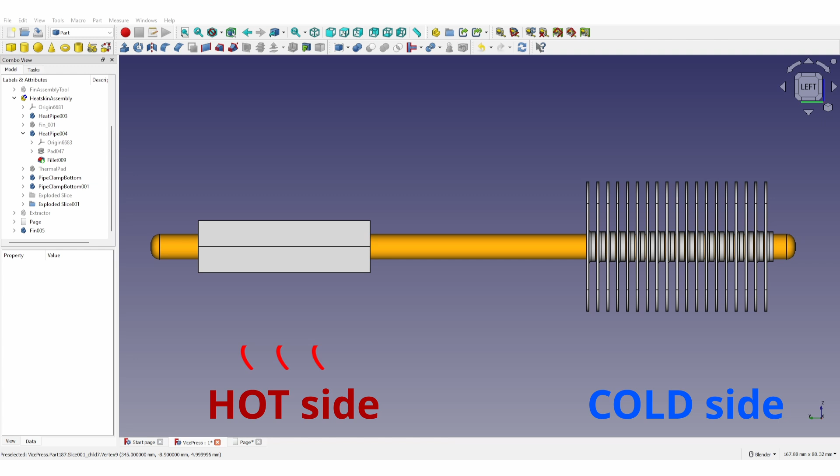However, before tackling the full-scale version I thought it would be wise to start with a smaller, simpler model to test the process. This is a typical aluminum finned heatsink with copper heat pipes. The heat pipes transfer heat from the hot side to the cold side, where it spreads into the fins. The heat is then dissipated into the air, usually with the help of a fan that pushes air between the fins.

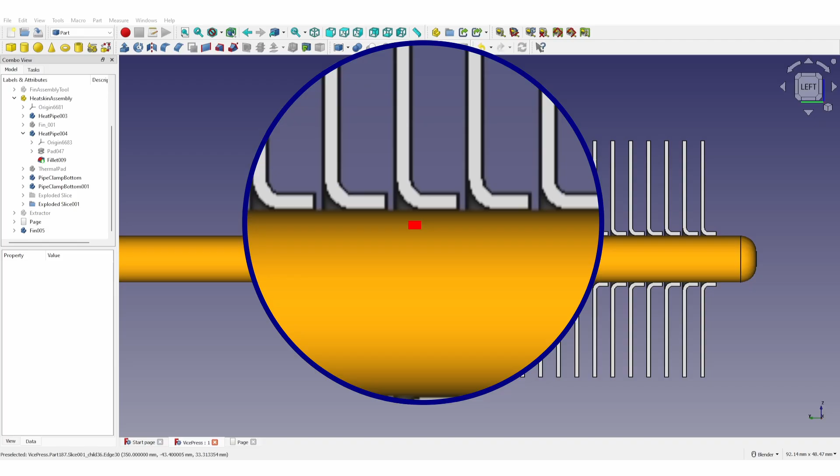The challenge here lies in the precise dimensions and tolerances at the interface between the fins and the heat pipes. The sheet metal is thin, and you want to maximize the contact area while keeping a low profile. This requires tight bending and tight fitting on the pipes.

So the question was, can the sheet metal be formed at this scale using dies made from resin on a low-resolution printer? The outcome was uncertain because resin-printed parts are quite brittle, and durability was also a concern. For a heatsink designed for a 40mm fan, you need about 20 fins. With a 90mm fan, you need roughly twice as many. So another question was, how many fins can you press before the die gets damaged? These are some of the questions I aim to answer with this test piece.

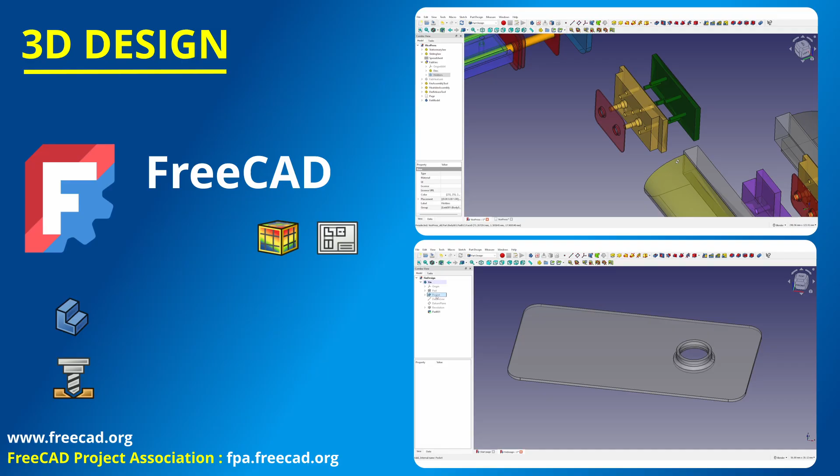So before going into the details, let's have a quick overview of the process and tools I used. For 3D design, I use FreeCAD, a powerful open-source mechanical CAD software. It is organized into workbenches, each tailored for specific tasks like design, simulation or manufacturing. Later in this video, I will show you two quick tutorials on the Part Design and CAM workbenches.

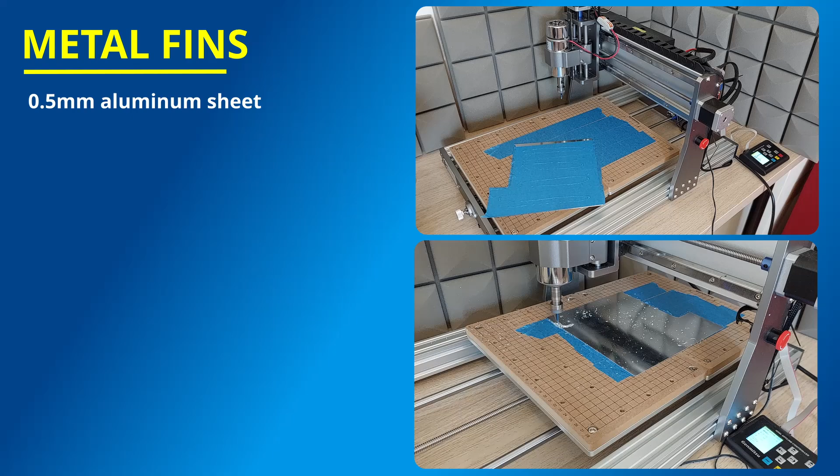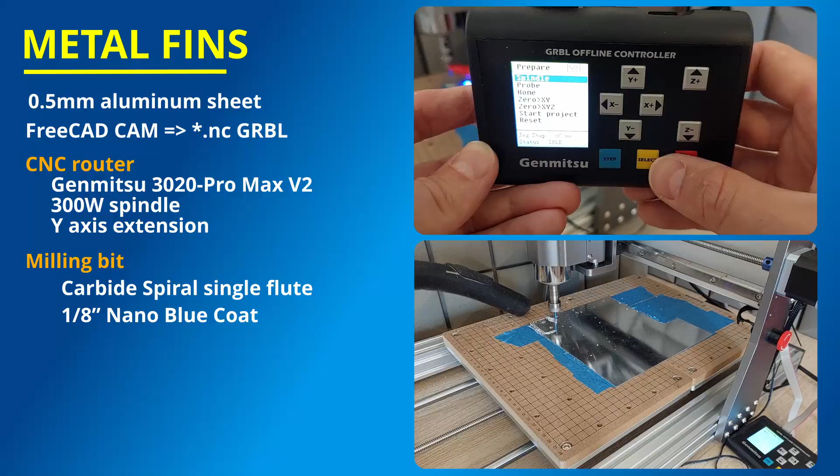The fins were cut from 0.5mm thick aluminum sheet using a CNC router. I prepared the job in the CAM workbench and exported the file in GRBL format to be cut on a Genmitsu 3020 Pro Max V2. This router has a 300-watt spindle which provides sufficient power for working with aluminum as long as the step-down and feed rate settings are kept light.

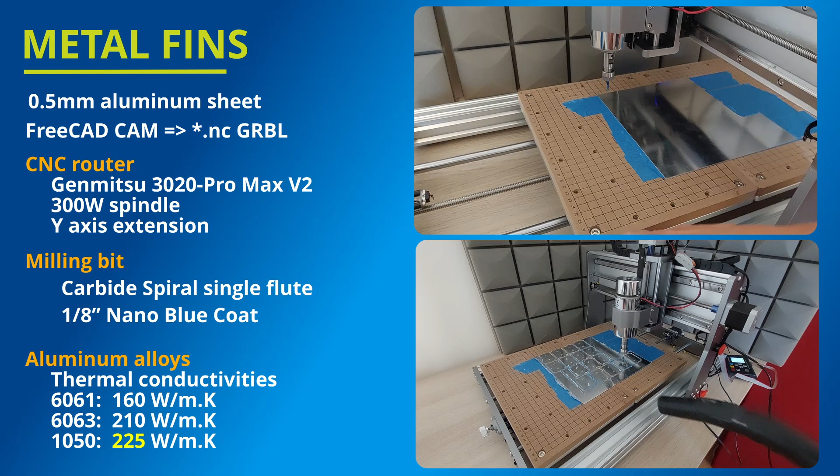For this test, I used 6061 aluminum alloy because I had this alloy in stock, but for heatsinks it is better to use 6063 or 1050 alloys, which have better thermal conductivities. The stamping dies were created in the Part Design workbench and then exported to Lychee Slicer. They were laid flat on the printer bed to ensure the features remained straight.

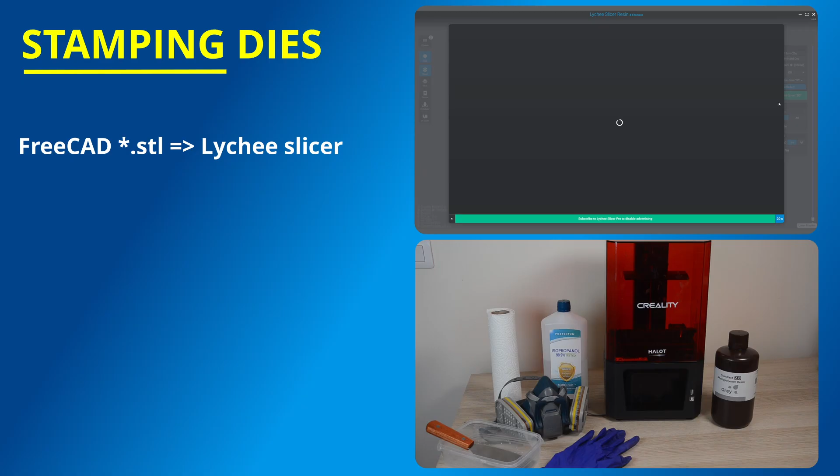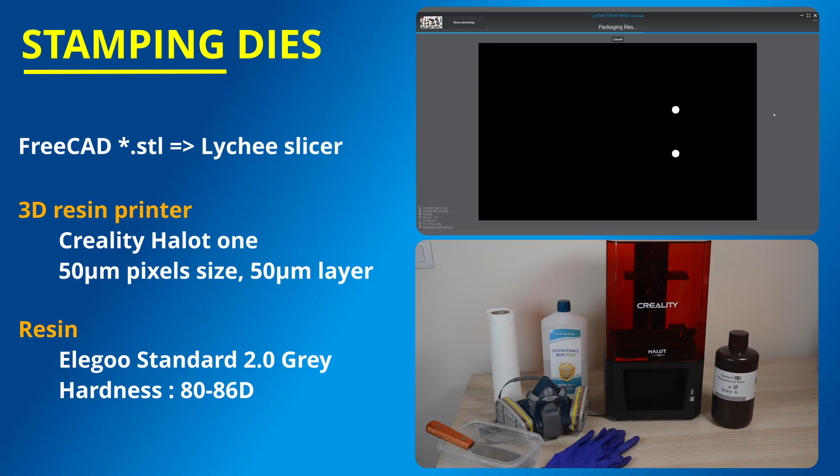I used the Creality Halot 1 printer, which has a 50 micrometer pixel size. While it's not the latest model or the highest resolution, it was sufficient for this task. I used the standard 2.0 grey Elegoo resin, which has a hardness of 80 to 86D, and the prints were cured under sunlight.

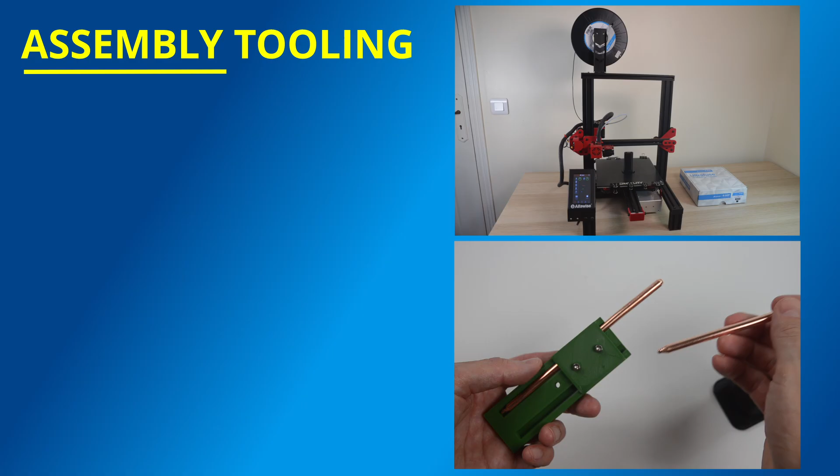The STL files for the assembly tooling were exported to Ultimaker Cura and printed on an Alfawise U30 Pro using standard PLA. Although the printer is not the most recent model either, it is still capable of getting the job done. Finally, the sheet metal forming was completed using a Vevor vise, which provides up to 2 metric tons of clamping force.

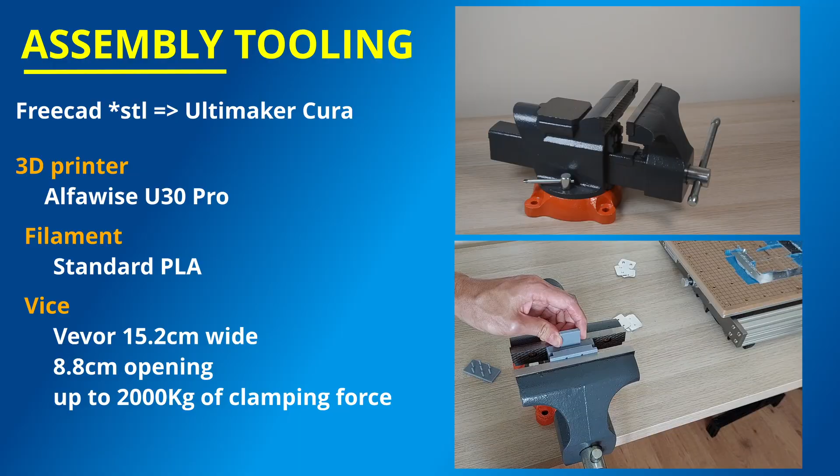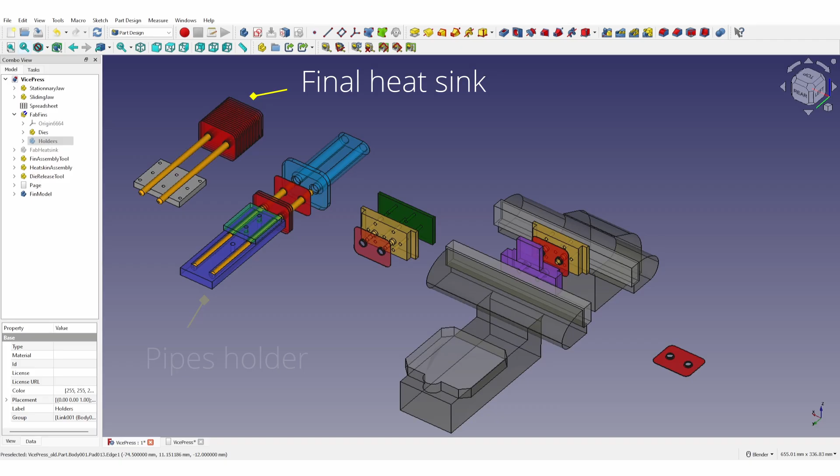So let's dive into the design with FreeCAD. You can see each step of the project: a fin, the vise and the stamping dies, a die release tool, the manual assembly tooling consisting of a pipe holder and a fin stacking handle, and the final heatsink assembly with a preliminary pipe clamp.

First, I made a 3D version of my vise and then I designed the fin and the stamping dies. I thought I would create attachments for the jaws to hold the dies in place, but in the end I decided for this test to hold the dies by hand, so I added a little tab on one side. We can switch to a 2D view of the fin and the dies made with the TechDraw workbench to better see their dimensions.

The heat pipes I am using are 6mm in diameter. For good thermal transfer between the pipe and the fin, a large contact area is needed between them.

I thought that 1mm would be okay, so I made the bending radius 0.5mm. This makes the fin 2mm thick. I chose to test a 5.9mm inner hole diameter. There are guiding elements to align the dies, and I added a wedge for a gradual bending of the metal

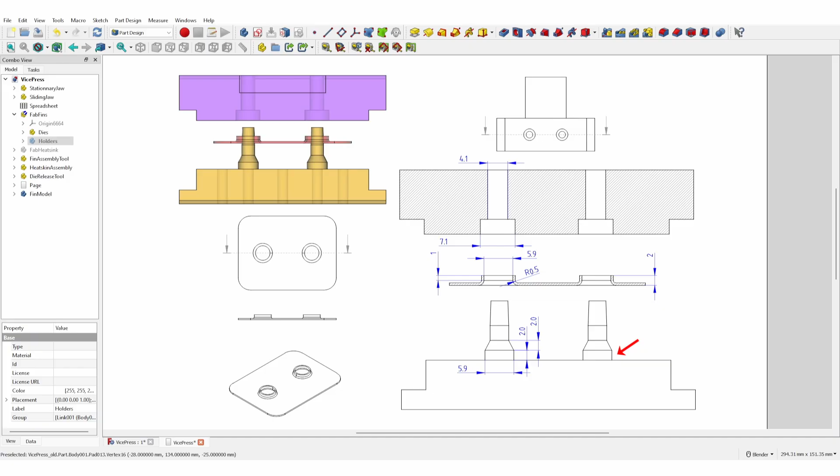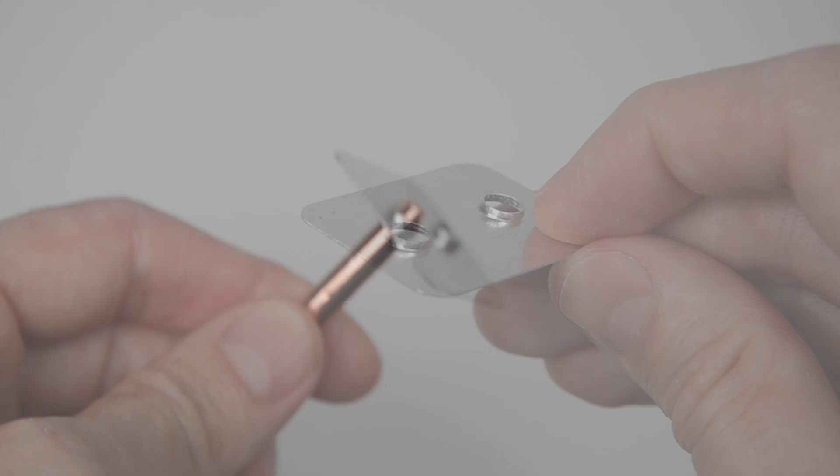sheet. However, as you can see, I did not make any drafts that could help release the stamped fin from the die. I did a first test and the sheet metal was hard to remove from the die, but the bending was good and the fit with the heat pipe was tight enough. I decided to keep the face straight to keep this good mating with the heat pipe.

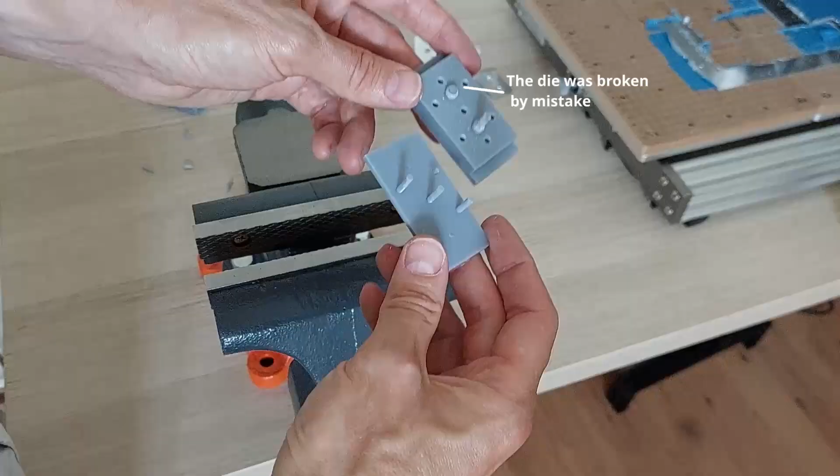So I made a die release tool consisting of small rods that are pushing the back of the fin through the die. As we will see later in this video, it worked, but most of the rods broke in the process. But I did manage to finish the batch of 20 fins. Clearly, I made the rods too small, although there was enough space to make them larger. Anyway, it probably can be done without this extra tool by using a small draft on the die, but that will be for another test.

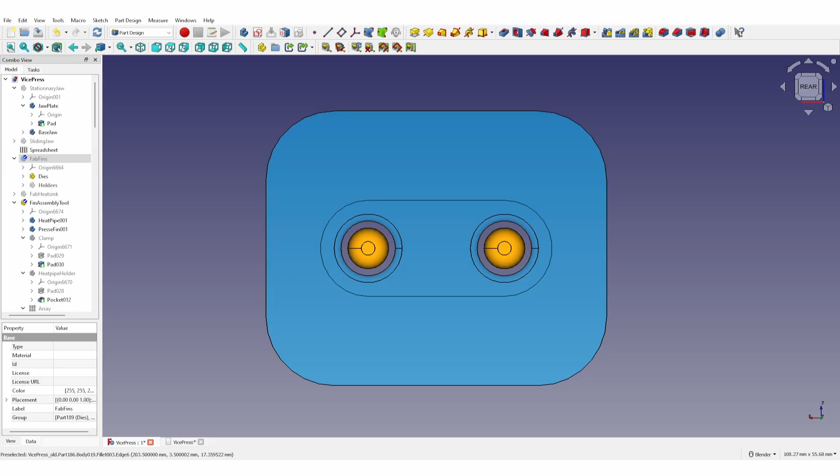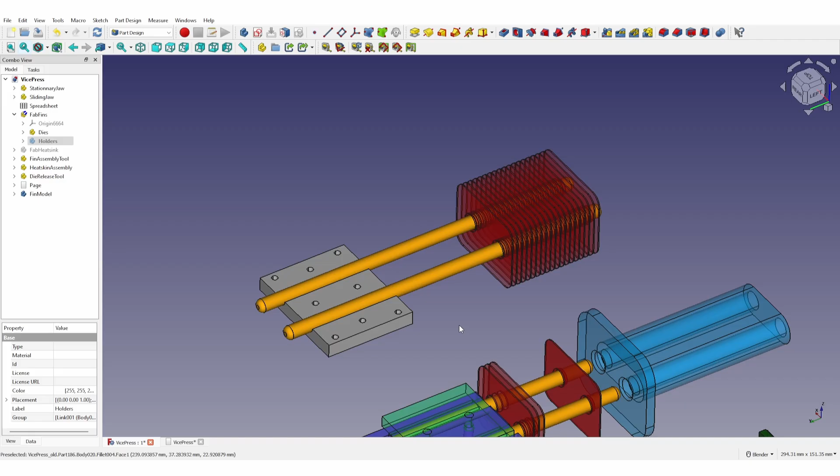Then the assembly tool is meant to hold the heat pipe parallel while the fins are being stacked. I overlooked the hole's diameter on the pushing stacking handle. I made them 8mm, but it was probably too wide. The tool could tilt more than would have been optimal. Anyway, for a larger version I will probably stack the fins using the vice and guiding elements between the assembly parts. Then there is the final assembly, which I can export to any other project in FreeCAD if needed.

So if you are new to FreeCAD, let me show you how to quickly design the fin for use in a 3D model and then another one for use in CAM to create a job for the CNC machining. So I created a new document. I go in the task panel, I create a new body, a new sketch, I select the XY plane, I make a rounded rectangle and set the dimension either using keyboard shortcut L or the toolbar.

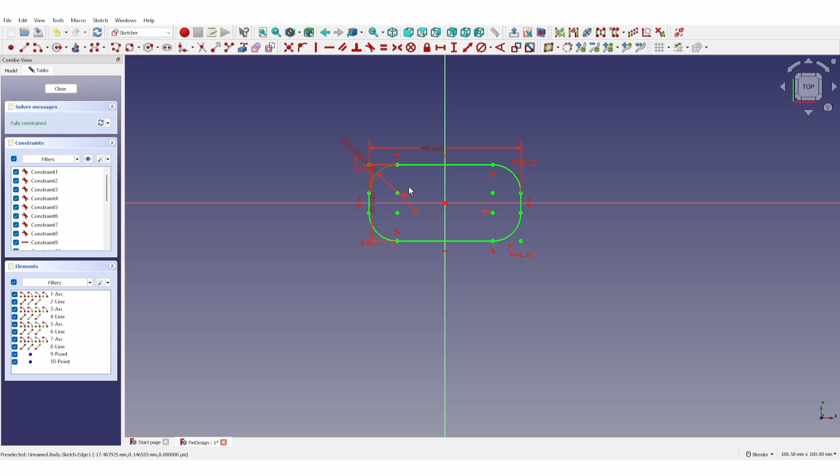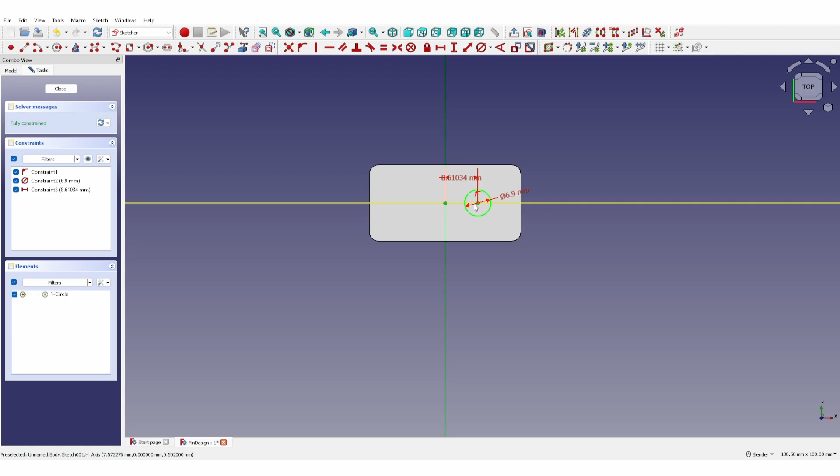Here I'll use, for example, the toolbar, 20. I make a symmetry to the origin. I press S and I make the radius with R, 5mm. I close. I make a pad, 0.5mm. I select the top face, create a sketch, make a circle, set the diameter to 6.9 and at a distance of 10mm. I close, I make a pocket.

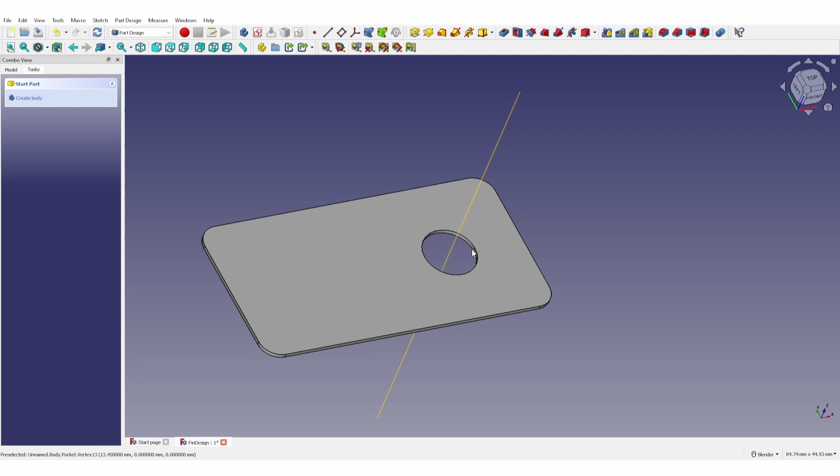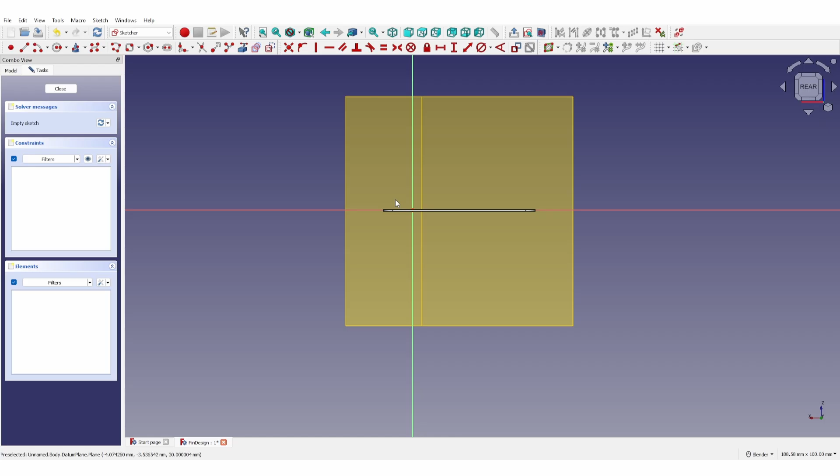Now what I want to do is create the bending, so I need to add a datum line. I create a datum plane and I constrain it on this edge and on the datum line. So this plane is on the hole. I create a sketch which is on the datum plane. I close and I hide the datum plane. It's still here, but it's not visible. And what I want to do is change the transparency so that I can select more easily the edge of the hole. I can at the same time rename the body fin.

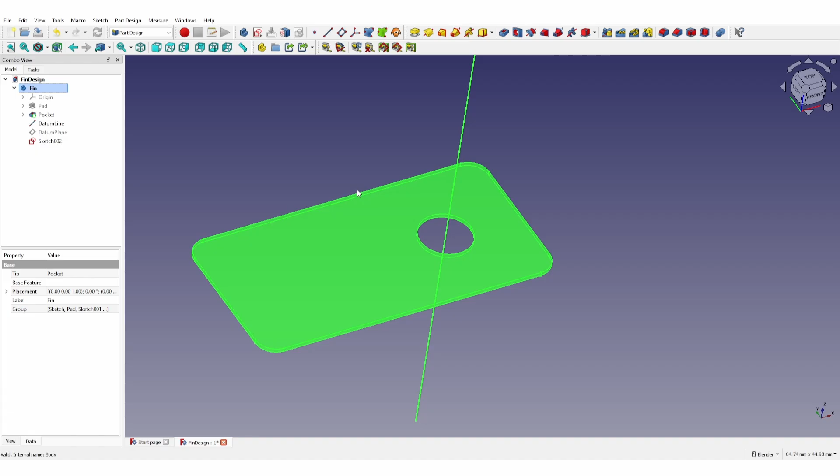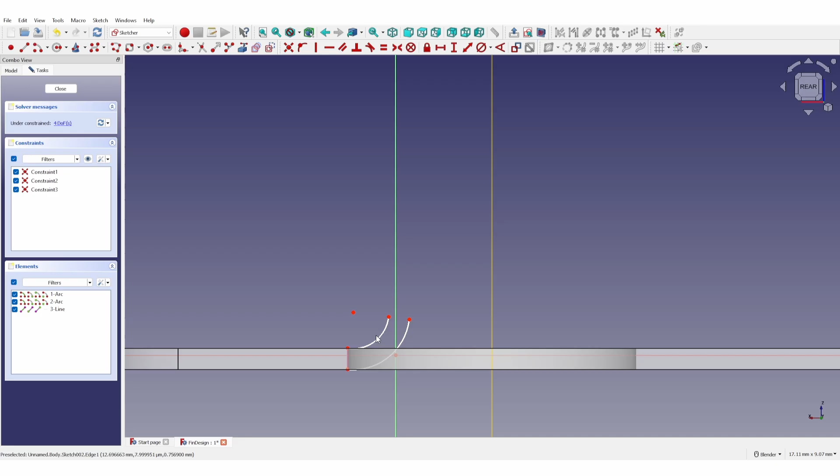I go back on the sketch and what I want to do is select this edge and project it on the sketch, and I can see it through the part. Now I want to do the 0.5mm radius bending. I need to close the shape so that I can make later a revolution. Here I switch to construction line.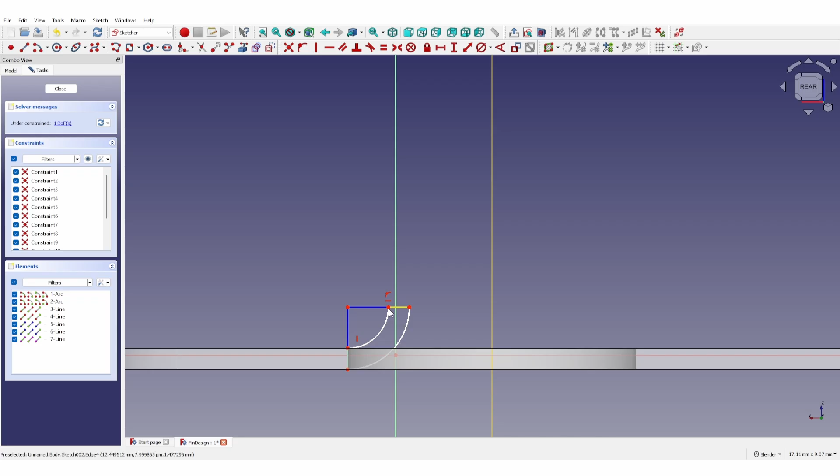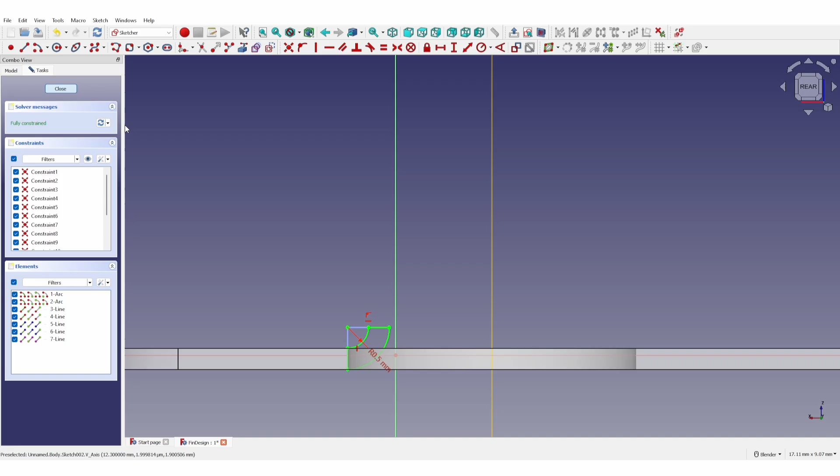I make one line horizontal and one line vertical, so I make it horizontal, here vertical, and this one I want to constrain the point onto the object. And here I set diameter of 1. Here it shows diameter, but I could set it to radius, and you see it's 0.5. I close, and now I can make a revolution. So I select the sketch, the datum line, and here I make a revolution. I select the reference. Okay.

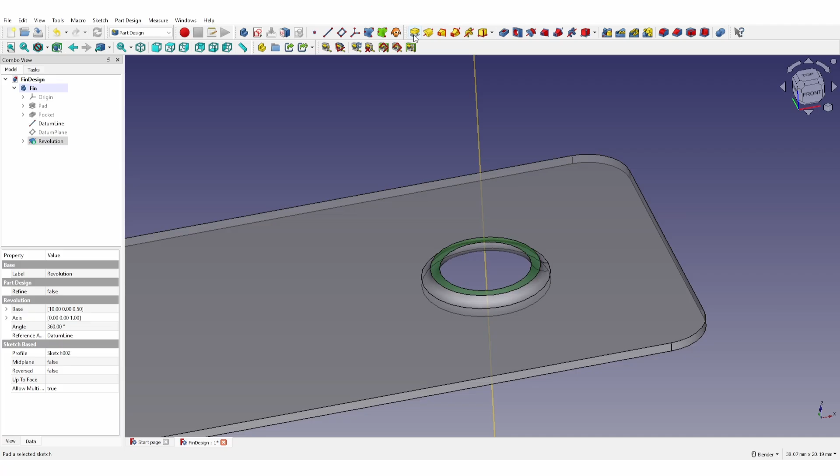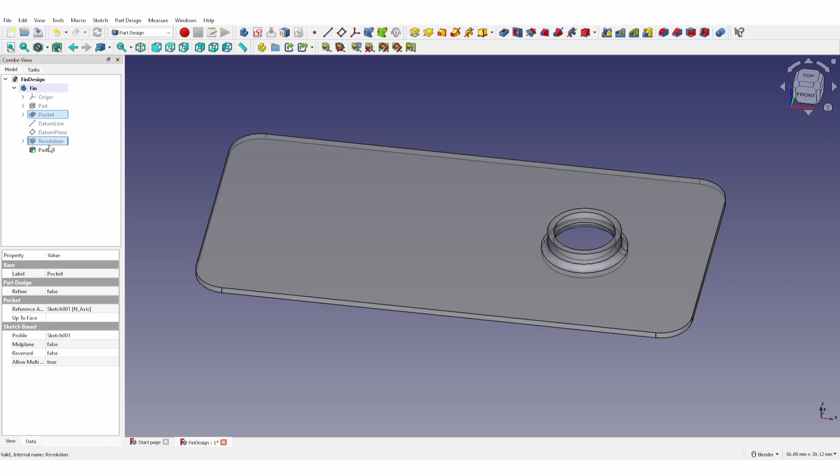Now I can select this face, make a pad of 1mm, and here I have one hole. I can hide the datum line. And now if I make a symmetry, first I select what I want for the symmetry. I want the pocket, the revolution, and the pad. And I make a symmetry. It selects automatically this plane, so I'm okay. And that's it. I have a fin to be used in a 3D model.

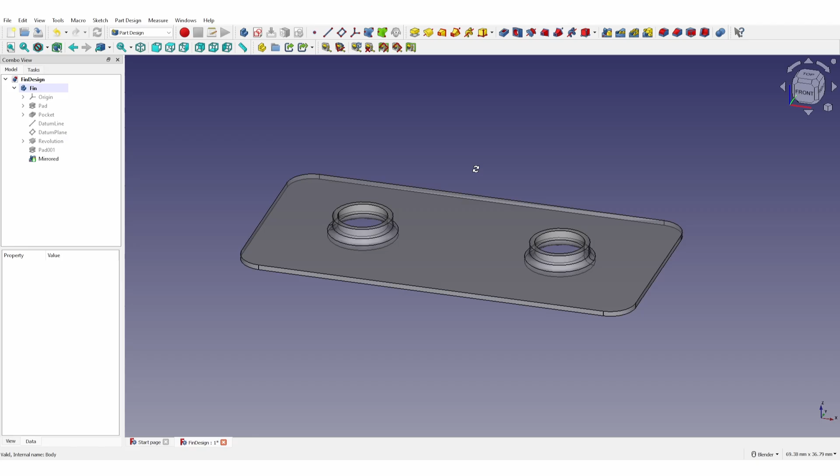Now let's see the difference with the fin needed for the CAM design. So to prepare the fin for the CNC, the process is a little different. Again, I create a body, I create a sketch, I add a rounded rectangle, I set the dimensions, I set the symmetry.

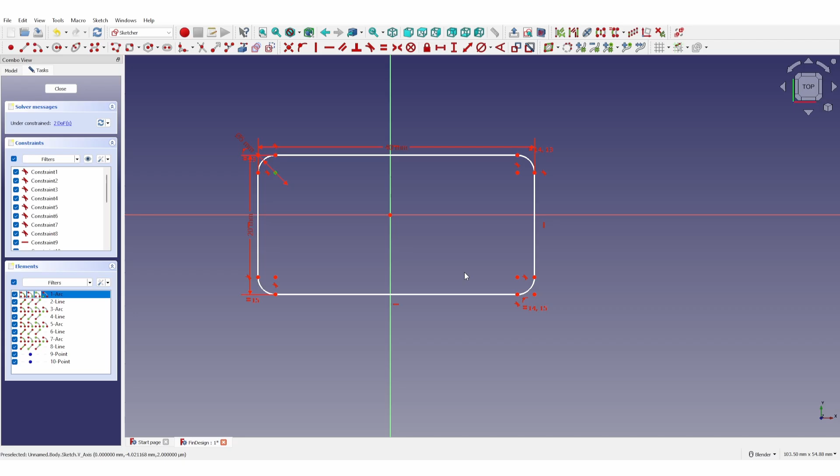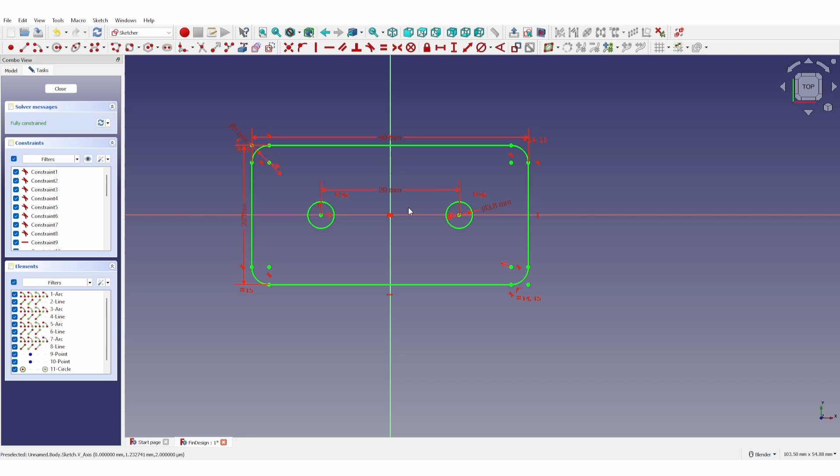Now the difference is that I add 2 circles. I set the dimensions to 3.8 millimeters and I set the spacing to 20 millimeters. The sketch is green, it is fully constrained. Now I make a pad of 0.5 millimeter and that's it for the fin. I can rename it fin. And now we can switch to the CAM workbench to prepare the job for the CNC.

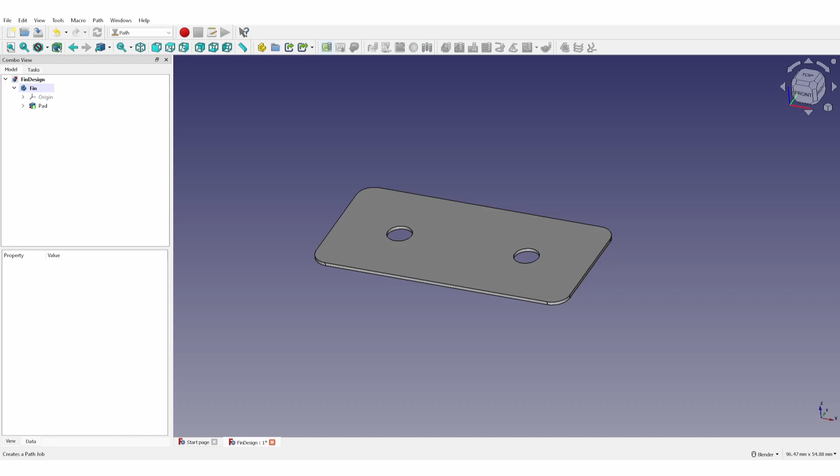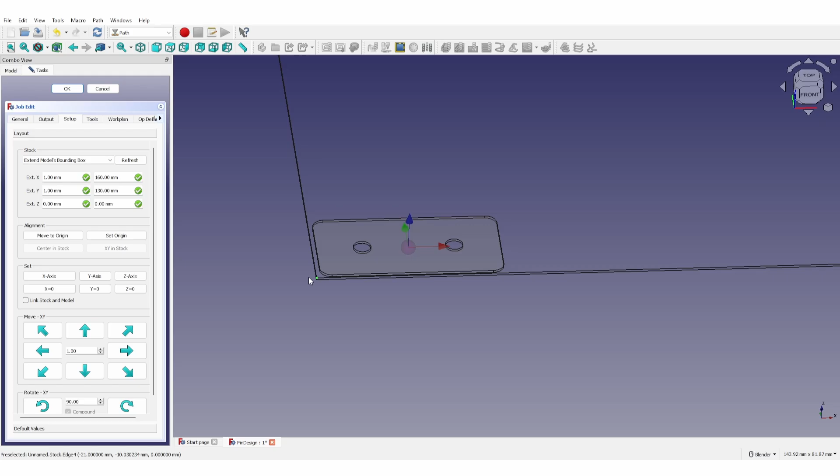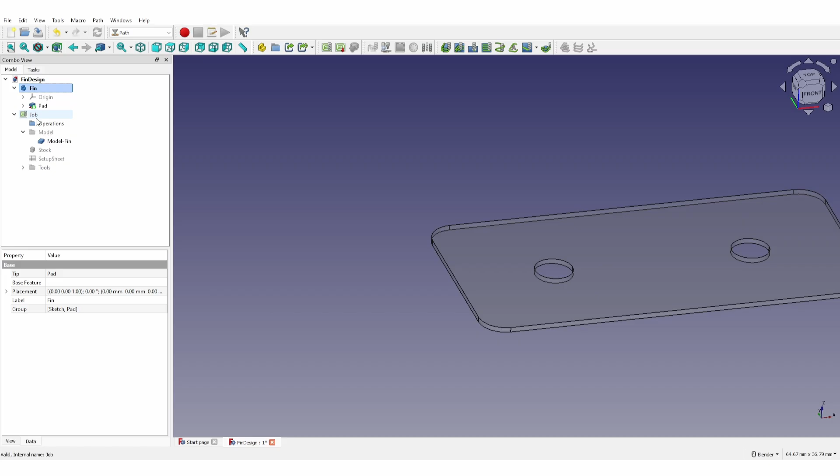So I create a new job. I set the stock dimensions to the sheet metal I have, 160 by 130. I set above and below 0 millimeter, and I want to set the origin in this corner. I want to output the job in GRBL, and the tool I will set through another interface. So I can hide the original model, show the stock.

Now I can add a tool. I already created a single flute end mill in carbide. I double click to add it. I remove the default tool. I change the spindle speed to 11,000 RPM. I set the horizontal feed rate to 100 mm per minute, 70 for the vertical. I go in the setup sheet to set the velocity when it's above the workpiece. I set the same velocities, although I could go faster.

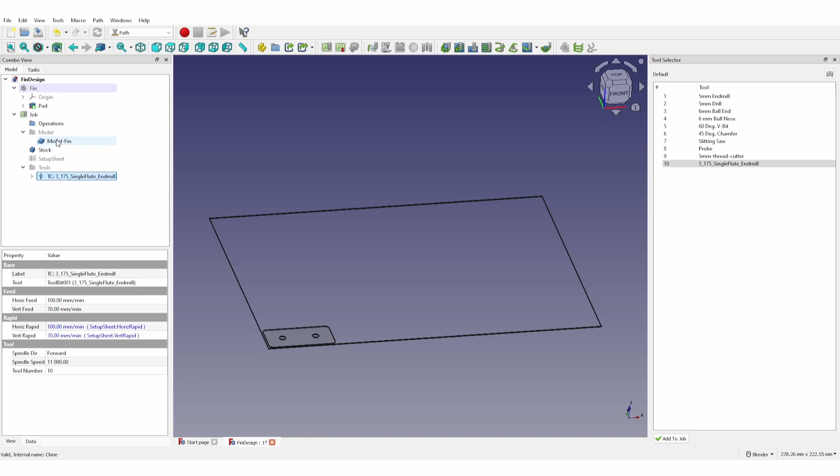Now I want to select the top face of the fin and select the profile operation. I set the depth. The top face is selected, so the start depth is 0. I select the bottom face and we see it's 0.5 mm, but I want to add an extra margin, so I will set instead 0.6 mm. I select the step down to be 0.2 mm.

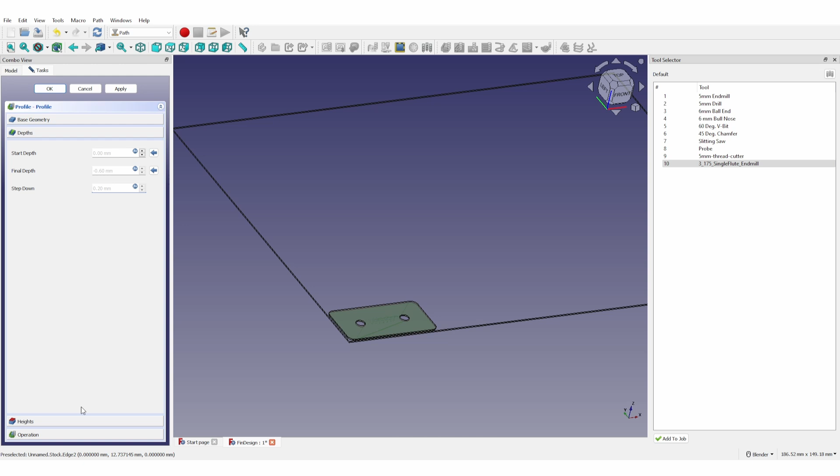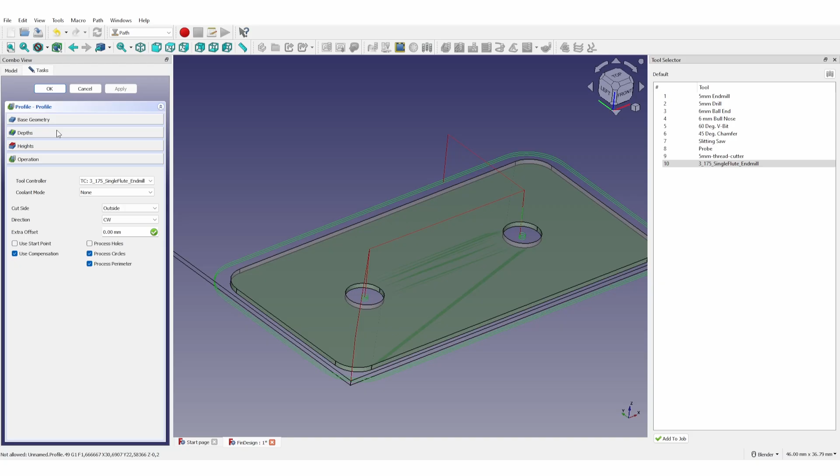I can apply to preview the operation. We see that there will be 3 passes, but the holes are not made, so I process circles. I apply, and we see the tool will go in the circles. And that's it for the operation. Now, I can close the tool selector.

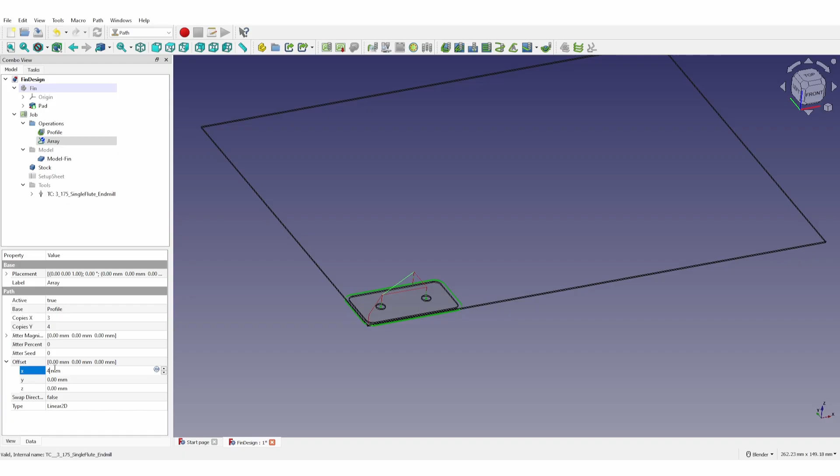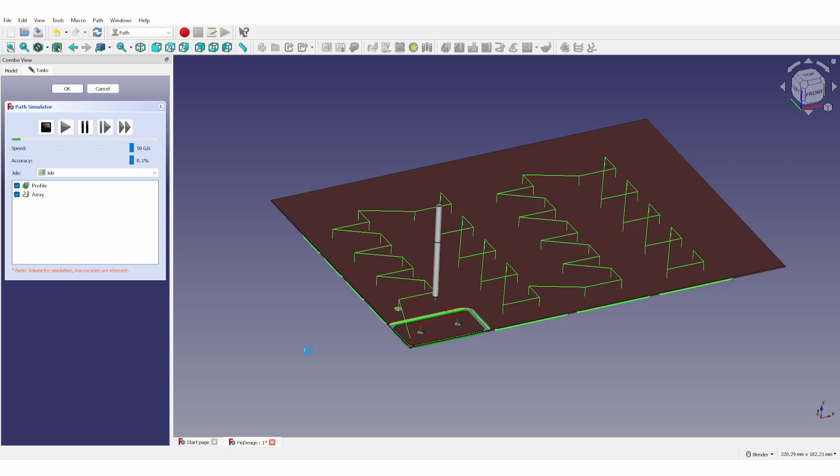One more step is to multiply this operation to have an array of fins. I created an array. I can modify it to be a linear 2D with 3 copies on X, 4 copies on Y, and an offset of 44 and 24 millimeters. And that's it. I have defined the operation. I can go in the simulator, I run, and we see that the tool correctly executes the operations. I can stop the simulation.

And then the step is to post-process. So I post-process, I select a location, and it opens the report where I see all the commands which will be sent to the CNC router.

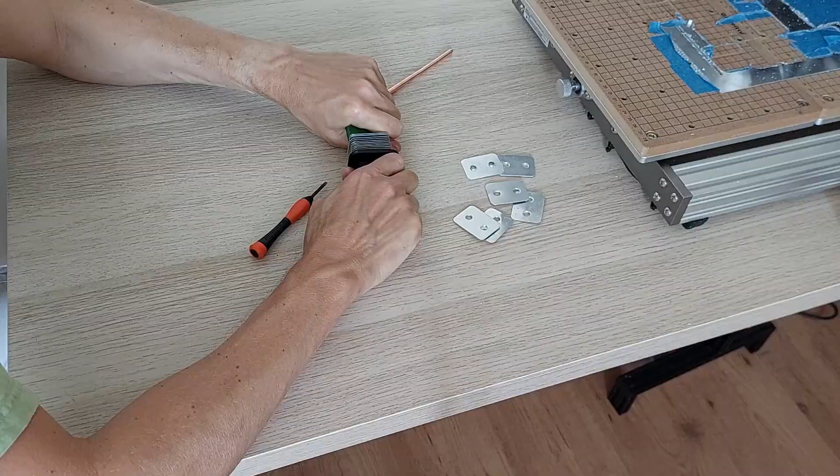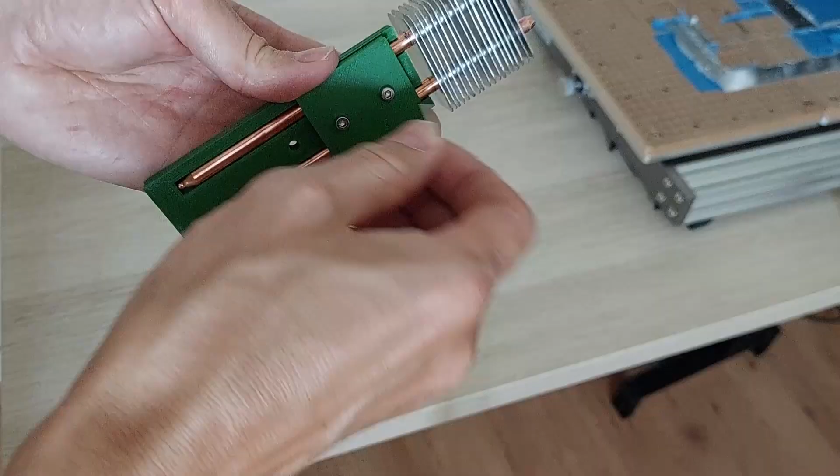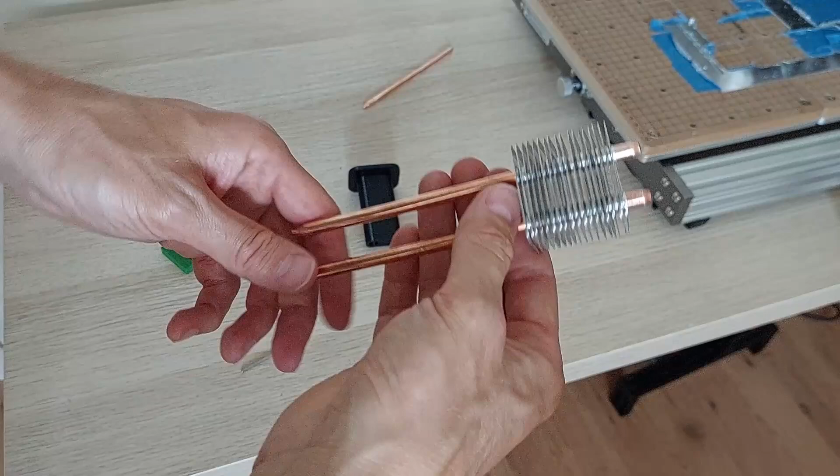So the fins are fully stacked. There was quite some resistance when stacking the fins, which is good, but there was a risk of pushing too hard and of the fins slipping and going too far. It would not happen if the stacking was done using the vise. That's what I will do in the next design.

In the next design, the heat pipe won't be straight, and it will have much more resistance because it will be using 6 heat pipes. Also, it will be for use with a 90mm fan, but the vise only has an 8.8 cm opening, so it will require a special fixture on the vise to correctly stack the fins. Anyway, I will show that to you in a future video.